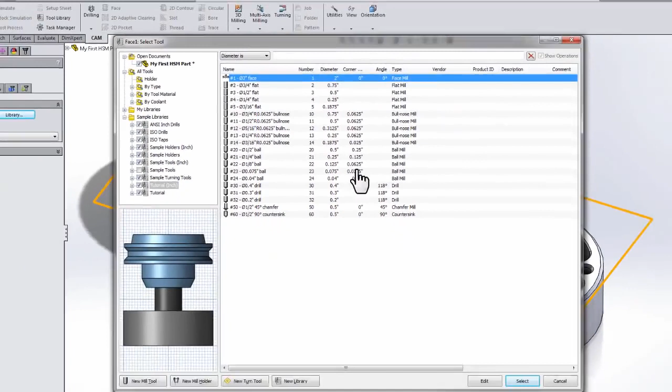We're going to click Library and navigate to the Tutorial Inch Library. Here we can select the 2-inch face mill and press Select. I'll simply click OK, and we have a facing operation across the top of our part.

You'll also notice we moved from the Feature Manager design tree, where we maintain a history of how the part was modeled, to our CAM Manager tree, where we'll begin to maintain a history of how we're going to manufacture the part. The other thing that's happened is we've created what we call a job, or a setup.

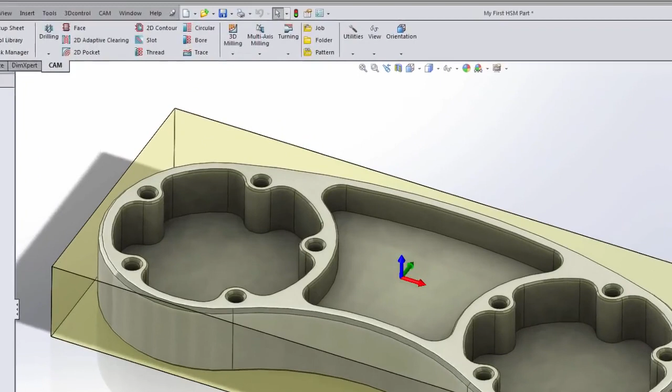A job is used each time we're going to fixture the part in a machine. Jobs can be created by using the job icon on the Command Manager, or automatically created, as it was in our case, when you're creating your first operation on a part.

Let's go ahead and right-click the job and select Edit to take a look at what information is captured within the job. The first thing we're going to notice is an area that defines the model we're machining. In this case, we have a single part body, so that's the only model we're going to be machining. But in many cases, you'll be machining a part that's in an assembly with a fixture or a vise and such, so you'll define which component it is you want to machine.

Next, you'll find an area that defines the stock. In our case, we used an automatic bounding box that simply added material around the volume of our part to produce a billet that we could machine this part from. But as you'll see from the tooltip, we can also define the stock using a cylindrical bounding box, a sketch, or even a solid body of a casting or forging or a billet that we're going to machine it from.

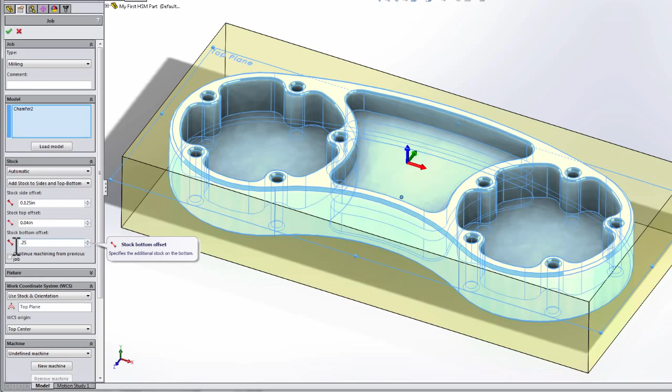Let's go ahead and increase the side offset around our part to 1/8 of an inch and increase the stock on the bottom to 1/4 of an inch to leave some material to hang on to with a vise. So the job contains the model information. It contains the information of the stock we're machining the part from.

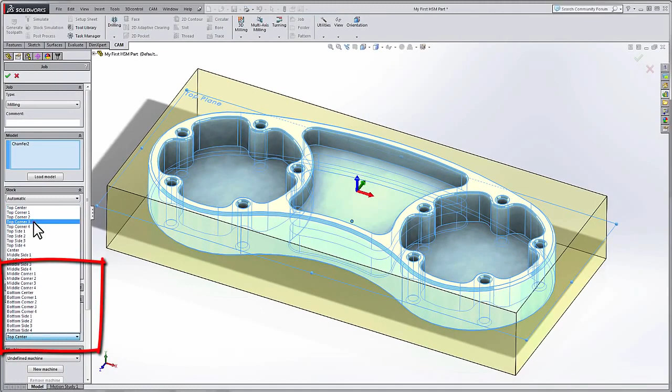It also defines where our work coordinate system is, or where 0 is going to be at the machine. Here we can see by default, we've got the origin at the top center of our model. I'm going to go ahead and switch that to top corner 3. So now our work offset on our machine will be at the top back corner.

At the bottom of the job setup, you're going to see information to define a machine if we'd like to run full machine simulation, as well as capturing some information about how we want to post the code out. We're going to address this later on in the video series when we get ready to post the code out for our machine. So let's go ahead and say OK.

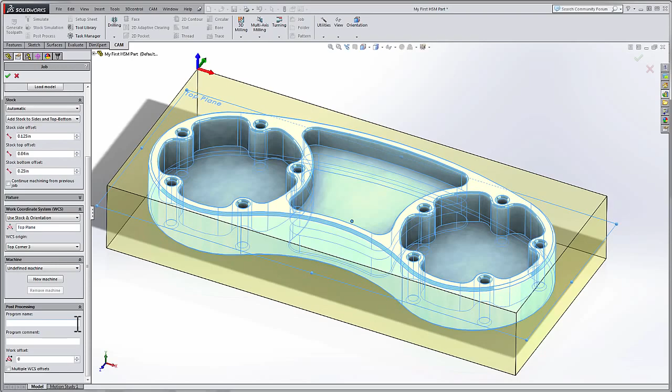And we'll see this little red X next to the toolpath. You're going to see that X next to the toolpath anytime we make a change in the stock that we're machining the model from, or if you make a change to the model in SolidWorks and the geometry changes. Now HSM is indicating we need to regenerate that toolpath based on the changes that you've made.

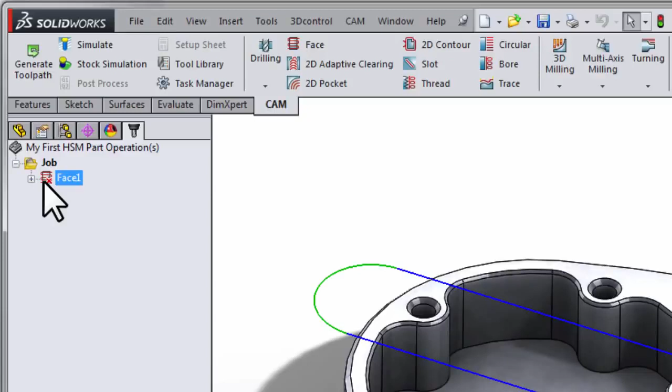We can simply hit Generate, and we have an updated facing operation that now faces out to the extents of our new stock that we've defined in the job. At this point, I think it's a great opportunity for us to go ahead and click Simulate so we can visualize what this toolpath is looking like.

I'm simply going to move down to the Show Stock area to show my stock. I personally like to set the stock as transparent, and in the section under the Show Toolpath, I like to change from Toolpath Before position to Tail at position. That way it keeps things clean while I'm visualizing how this operation is looking.

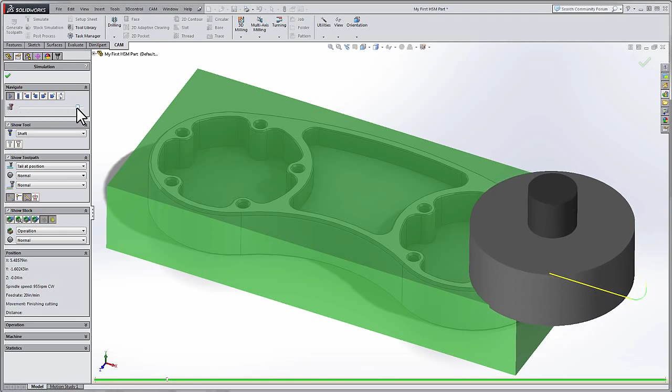We're going to go ahead and press play and maybe speed the simulation up a little bit to see this facing operation machine across the top of our part. We can click OK to get out of the simulation.

So with that, you should have a good feel for the layout of the product, how we move from the Feature Manager, where we're containing the history of how we've modeled the part, to the CAM Manager, where we contain the history of how we're going to manufacture the part. We also know what a job is. And finally, we're seeing operations inside of the job that are the different operations we're going to use to machine this part.

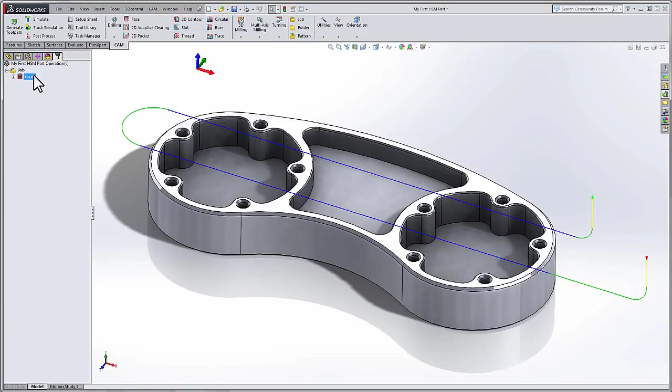With that basic foundation of the software, let's move on to the next video where we begin creating the remaining operations to machine this part. Our final video in this series will look at post-processing the code for your specific machine.